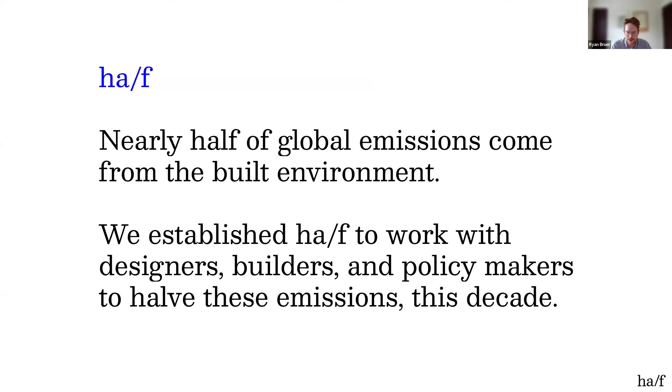And quick intro for HAF. We started HAF 4 years ago and realized that to reduce the construction emissions in Canada, we needed to work together. We needed to raise the bar of education for designers and builders and policymakers. So that's the work we have been pursuing together as a small group of architects ourselves over the past couple of years.

And HAF of what? It's we know that all building has a negative impact on our globe. It uses a lot of raw materials and there's significant greenhouse gas emissions, and our work is how do we halve these emissions and how do we go beyond that? And so today I want to frame our problem as a two-sided coin of the lower carbon and the lower costs.

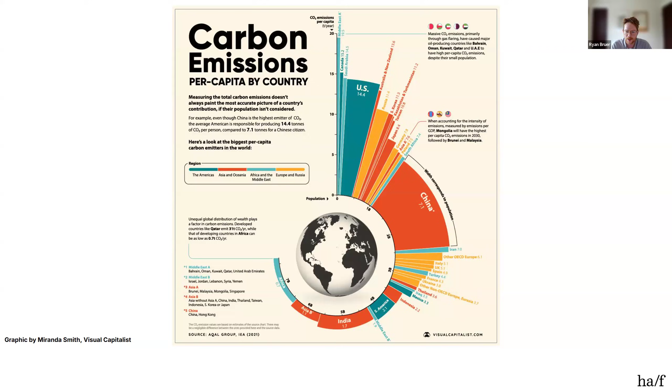We inherit a fairly rigorous federal policy and federal targets around lower carbon. And for us as Canadians, we don't look so good when you line us up per capita against the rest of the world. And so maybe that's good news.

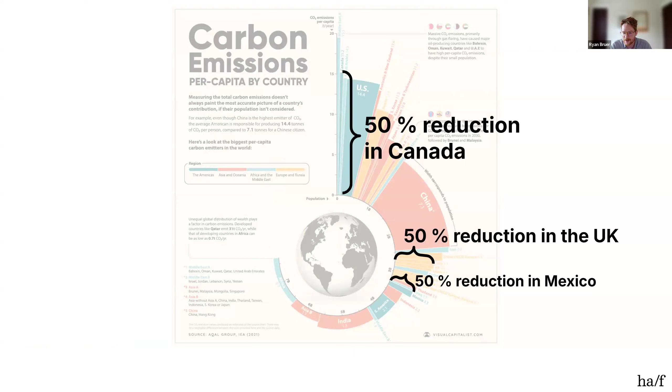Maybe in order to cut emissions, it should be easier for us as some of the top per capita greenhouse gas emitters compared to our friends in the UK or in Mexico, where shrinking that bar by half would be much greater challenges. I think there's lower hanging fruit for us to achieve. And on the other side, we're now on a slow march towards building in Canada, and this idea of how we do it at lower cost.

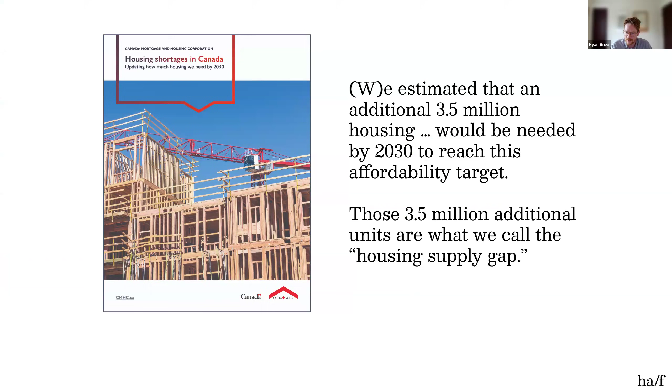We have really ambitious targets for delivering housing, 3.5 million housing units by 2030. We know there are several initiatives like Build Canada Homes that are seeking to do that. But that's also coming at a time where there's this crunch, where we have lower starts this year, and how we're going to get there becomes a little more of a question mark.

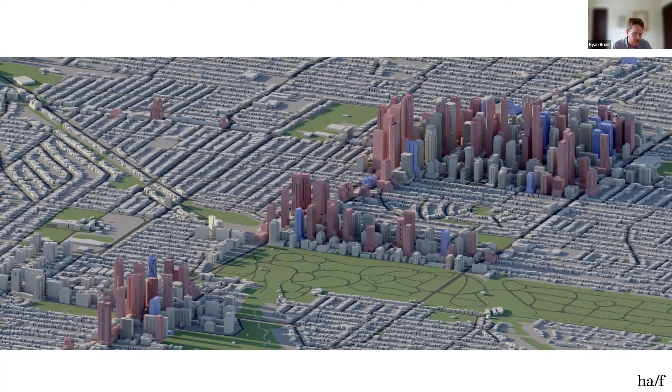At this time, the opportunity is there to reimagine what might have been fixed. We might have seen the type of development that was going to happen in our country, in our province, as a little more certain than it is now. And I think that's an opportunity for us to reimagine.

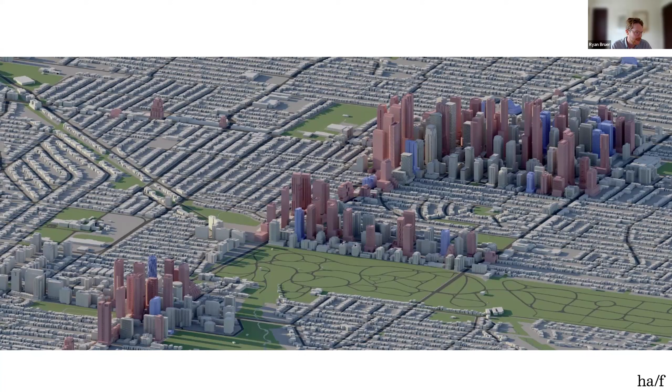Instead, here you can see the proposed projects. This is Midtown Toronto, where the type of density that we imagined seemed certain, and now maybe there's an opportunity for us to rethink it, because we know that not only the method of construction but also our method of planning and development has a huge impact on the carbon emissions of those developments. So here you're seeing, although it's housing for families, for citizens, it's not equal in carbon emissions per year.

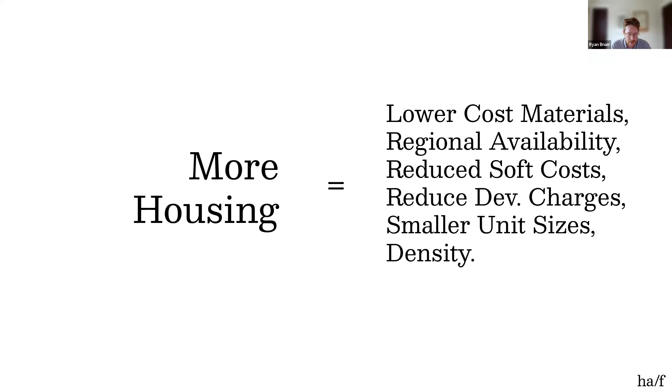So here's our objectives: more housing and reducing emissions. On the one hand, we need lower cost materials. We need regional availability with no supply chain risk. We need to reduce the cost and timelines around design and development charges. We need to rethink density.

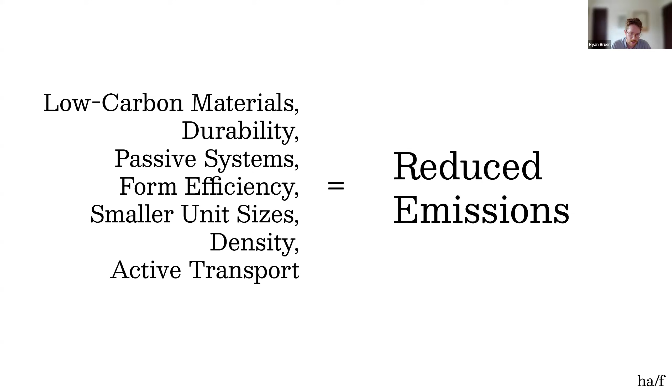And on the other side, we need to understand how materials are made, where they come from, and their life cycle impacts. We need to think through durability and the replacement of materials, passive systems, form and efficiency of unit layouts, and then, of course, how it integrates with active transport that's low carbon.

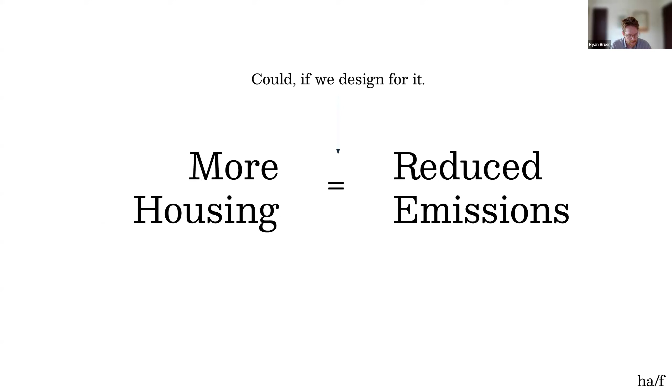And what we want to propose this morning is that I think these can be done together if we design for it. So what we're going to do is share some strategies on how we approach a project at ha/f, and some of the strategy you could take to your own projects.

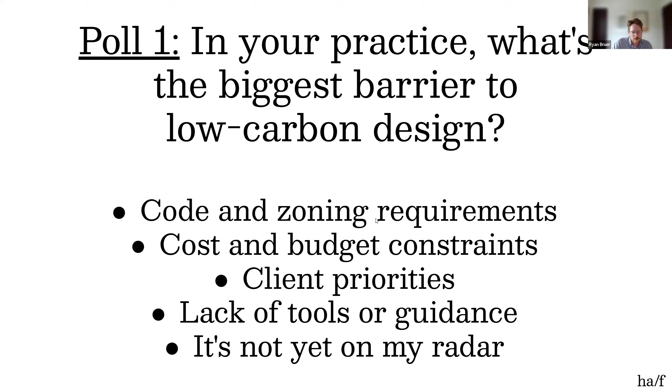And ultimately, that's where we started. We said, okay, we need to raise the bar in design knowledge. We have the findings, we understand the importance of this, but how do we train more professionals and get it out there? This was also on the mind of the Treasury Board Secretariat.

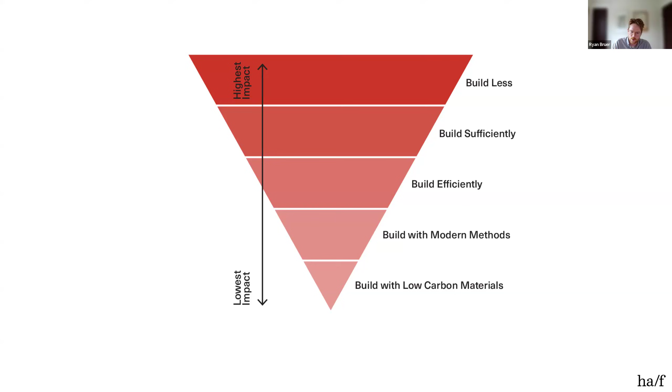They wanted to upskill all their project managers, and the goal was to have a primer for low carbon construction. Together with them, we borrowed a bit from the structural engineers out of the UK, and we found this pyramid of low carbon design strategies to be really successful, because you have at the top the most impactful decisions, and you can work your way down this pyramid to make changes on your project.

We found that these strategies of build less, build sufficiently, build efficiently, low carbon modern methods of construction, and low carbon materials actually mapped pretty nicely onto our phases of the project. Because just like cost, you want to make those big decisions up front and stick with them, because changes late in the game have high cost. It's synonymous with how we think about carbon impacts too, where inefficient structures and unfortunate product substitutions can have a big impact.

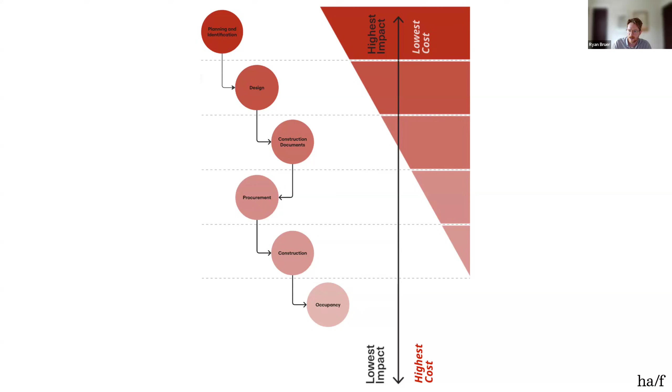So we took that strategy and mapped it onto the project phases, and drilling in even further into the project phases, we want to address how we can ask the best questions at the right moment to get the outcomes we want. So from very early on, you can ask those really important questions about existing assets on site. Is there an opportunity for renovation to extend the life of the building that's on site?

What we found when talking with project managers is that there are a lot of newer option analysis tools and reports that can be produced by consultants that are interrelated, that will inform key decisions on how to best make that decision. So having an energy audit and a whole life building life cycle assessment really gives you the full picture of the carbon profile.

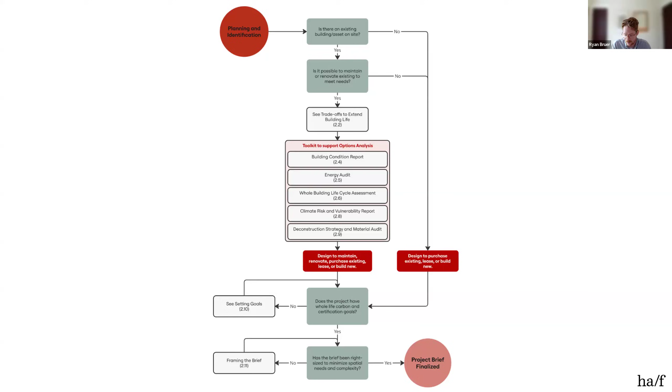So this kind of flow chart here, we produced a few of these for each of the project stages. The idea was how to explain to project managers how these reports interrelate, so that they can optimize their decisions on how to set the right kind of goals, and ultimately, if required, how to right-size a new construction if that's the path that was taken. So let's talk a bit about build less.

What do we mean by that? I think the best way to describe this is about unlocking the value of existing buildings. It's about extending the life of a building, of the kind of carbon bank that we have within our cities. And so the study went through three options.

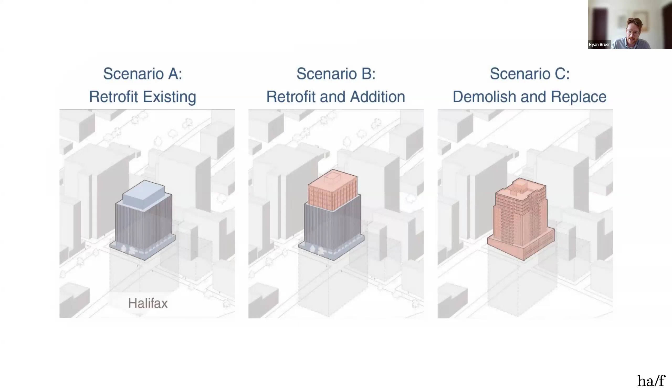We did this work with the Canadian Association of Heritage Professionals, and the goal was to understand how these three scenarios would play out in three cities across Canada: Halifax, Montreal, and Vancouver. We had different scales of buildings: a larger apartment building, what it would look like for a single family home, whether you'd demolish or retrofit, and then likewise for a lower rise mixed use and residential building in Montreal.

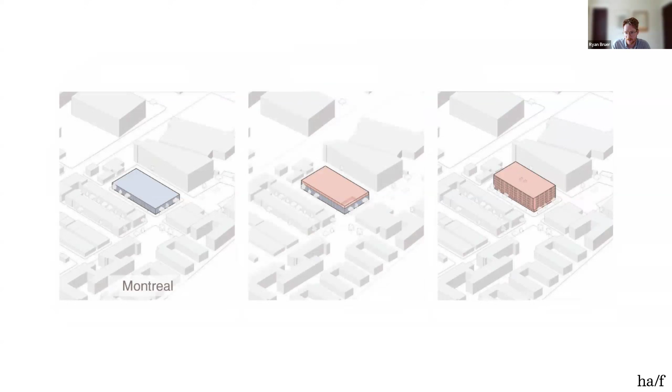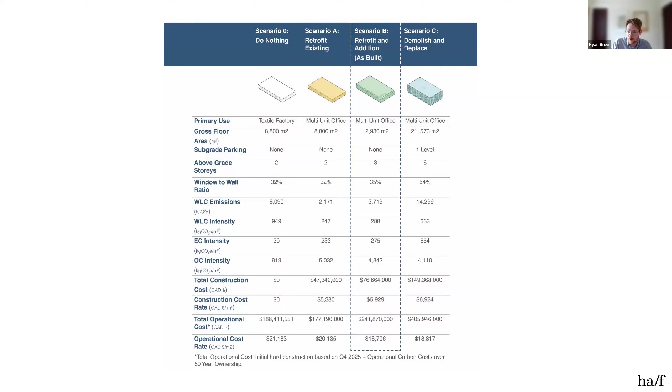And what we consistently saw play out was that for each of these, when you run the numbers on the cost, and on the operational emissions and cost, unsurprisingly, doing nothing is not so good. We have buildings that are high emission, they're expensive to run. We need to upgrade them to suit our needs.

But also on the other side, demolishing and replacing was actually a higher emission activity, and it didn't provide the cost benefit that we were expecting. This was consistent across all the sites and designs, where demolish and replace was in some cases actually slightly higher cost overall than the retrofit and addition option.

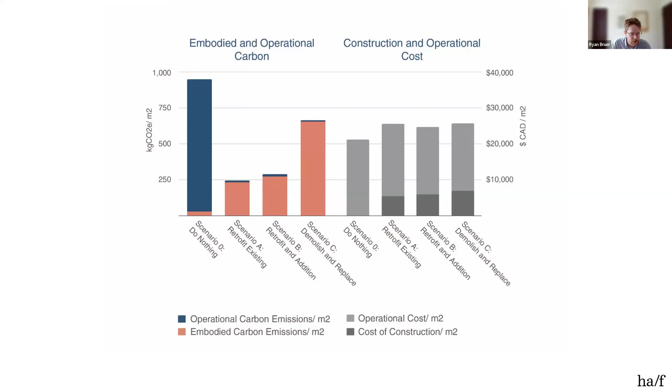From a circular design perspective, this accomplishes what we also, as a secondary goal, want: we want to avoid waste streams. Demolition waste is a huge issue, and as an example of this, in this Montreal example, 290 dumpsters full of landfill were avoided just by doing the retrofit and extension addition option.

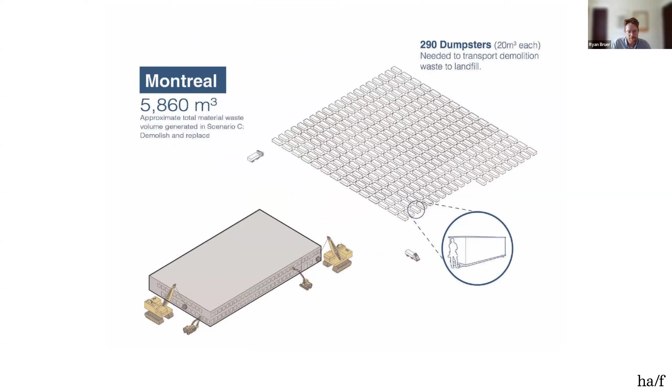So, like the way we do maintenance on our buildings, we were trying to frame this as a way of doing maintenance on policy, because the problem is the National Energy and Building Codes are a bit more prickly when it comes to alterations and reuse.

The purpose of this research was to accelerate code change to standardize renovation in the National Building Code. We have exceptions in a few municipalities across the country, but the goal is to get in there and start repairing essentially some of the codes to allow for this kind of work. It's a long process, and it takes time to make these kinds of changes. And repair is like that, right?

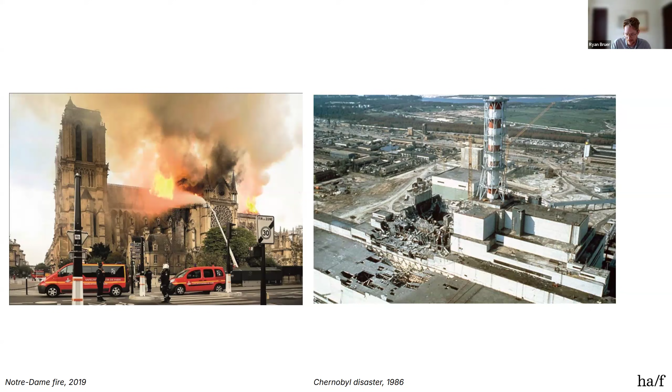I thought I'd share an anecdote, it's a chancy situation, repair. Repair is always a disruptive intervention in an intricate system. On screen we have two famous building disasters, but these were essentially from mismanaged maintenance. The bungled routine system test at the Chernobyl plant led to the nuclear meltdown in the 80s, and more recently, the Notre Dame Cathedral fire was caused by a repair happening in one of the spires. This is one of the challenges when it comes to code changes: we have a very complex system, and we don't want to get in there and move too quickly and break things.

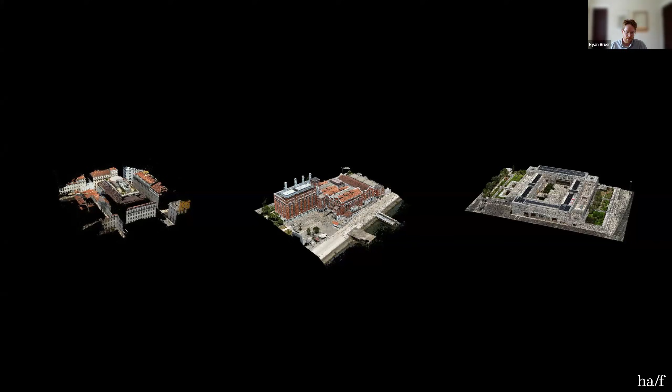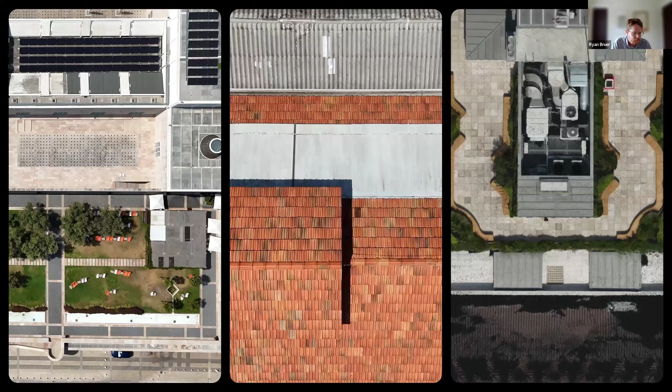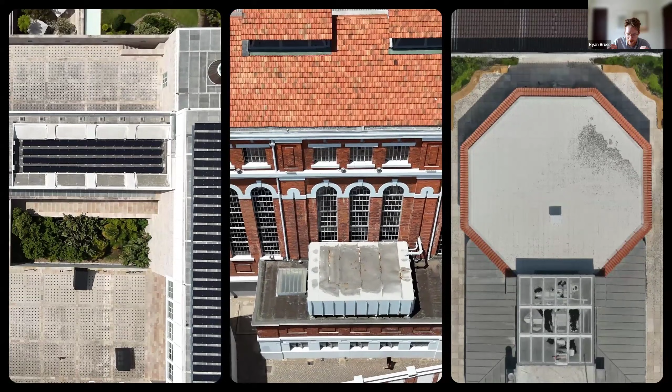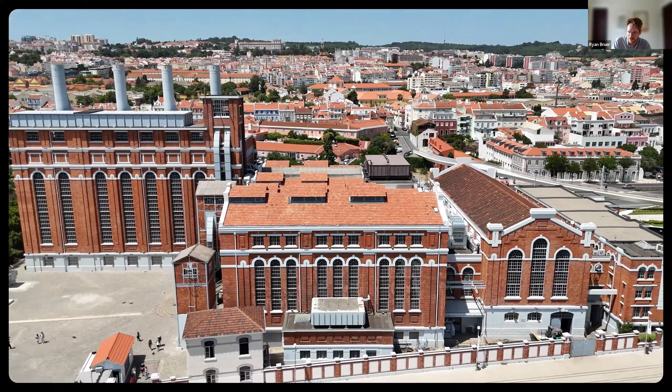Ultimately, I think what we're finding more and more as professionals is that our work, although it might previously have been seen as innovators and imaginers of new projects on a pristine site, is really more often now caretakers of the existing context. I think that's a healthy way for us to think about our practice. We are stepping into a world where everything exists, and it's about our management of that asset. That really was one of the findings we had in Lisbon.

Sufficiency means having enough quantity to meet the need, so I'm distinguishing that here when I talk about building sufficiently, compared to building efficiently, which means producing the maximum result with what you have. We believe that sufficiency is the first question.

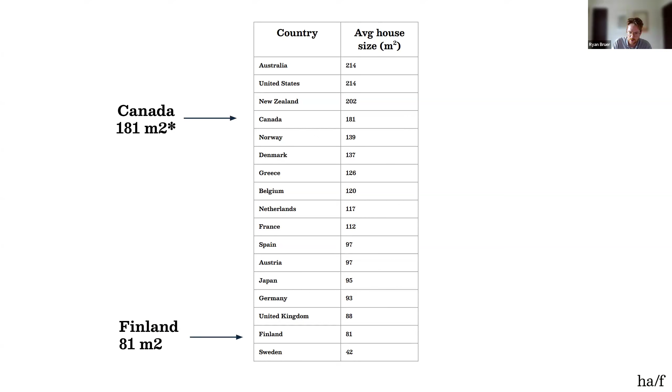There's no better example of sufficiency than thinking about average house size, which over the past 100 years has gotten larger for fewer people. In Canada, we're top ranking in average house size per capita, while we know there are extremely livable, beautiful, excellent places around the world where people live in far less space. This also plays out at the urban scale.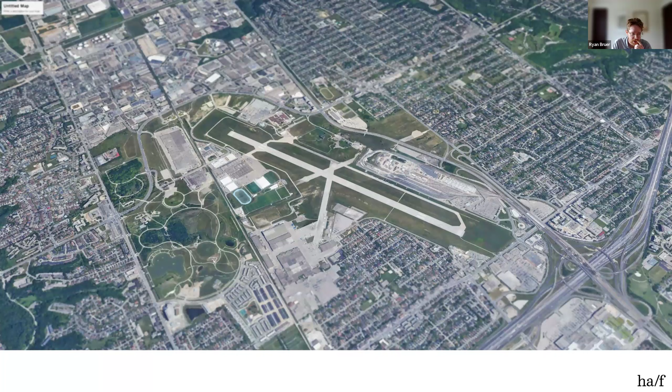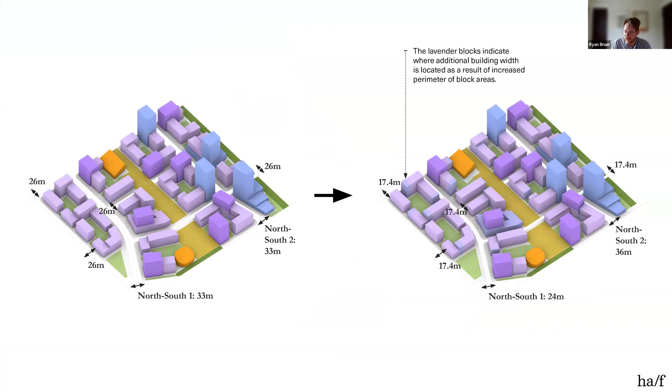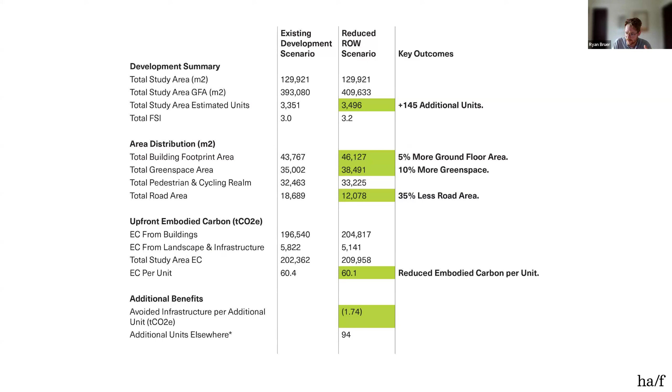We saw this with work we did with Northcrest in the Downsview redevelopment. As the master plan was coming together, Northcrest asked if we could take a small sample area and play around with the right-of-ways to understand if we could meet the traffic and transportation needs while still delivering on the design intent. We began tweaking some of these block shapes and right-of-ways, and you can't really see it visually from the diagram, the small tweaks. But what you're able to deliver statistically is more housing, more green space, and less road to maintain, while still delivering a thriving, rich urban environment.

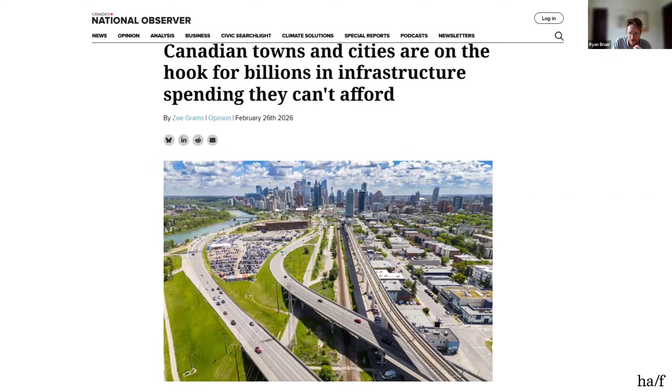Ultimately, this speaks to this ongoing realization that the infrastructure burden is getting carried by municipalities, and we need to start considering that more closely when we think about delivering housing.

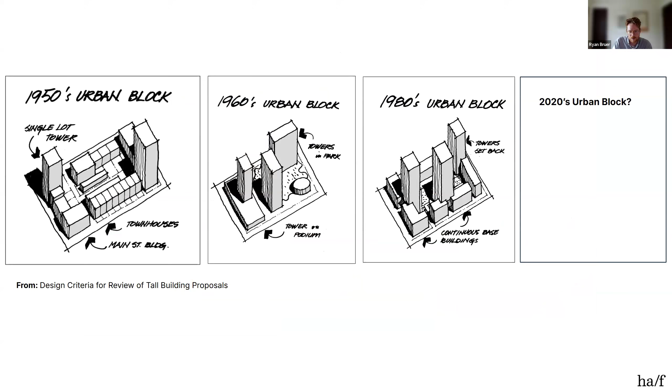Moving on to building efficiently, a good example of this is how do we maximize the use of what we have. We did some work with the City of Toronto on their urban design guidelines. They wanted a fresh look at what's driving carbon behind some of the decisions in here. The first step was looking at the genealogy of the urban design guidelines. It's not a fixed standard, it's something that's evolved over time, and there's this legacy of renewal and modernist thinking around the block. Our challenge was how do we maximize the block, how do we use it for its best use?

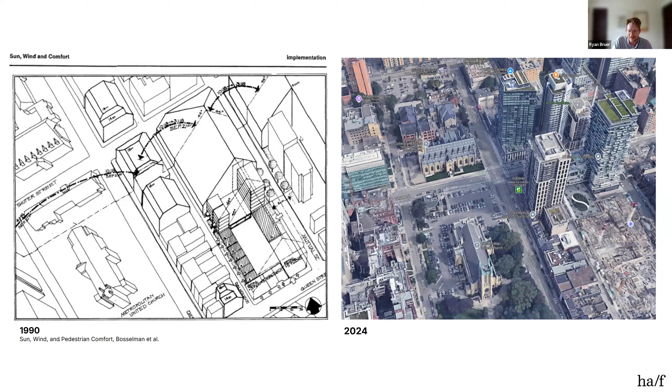We've had some really ambitious aspirations around these urban design guidelines, like daylighting, for example. What you'll see, and I like this comparison, is how these designs were drafted up. This is around one of the oldest churches in the city of Toronto, Metropolitan United. Not exactly what came to fruition, where you have larger buildings ultimately in the end. So the implementation of this policy didn't exactly play out, and unfortunately it has driven and continues to drive a type of building that is higher carbon and higher cost.

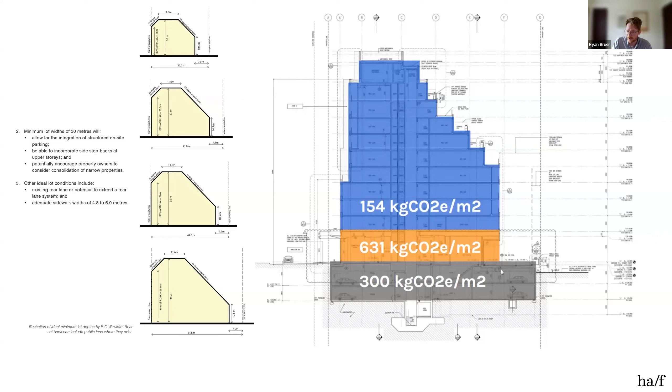This is your typical wedding cake mid-rise building in the City of Toronto, which has had these strict setbacks applied to it. What you see here in blue, orange, and gray is that each part of the building is not the same when it comes to embodied carbon.

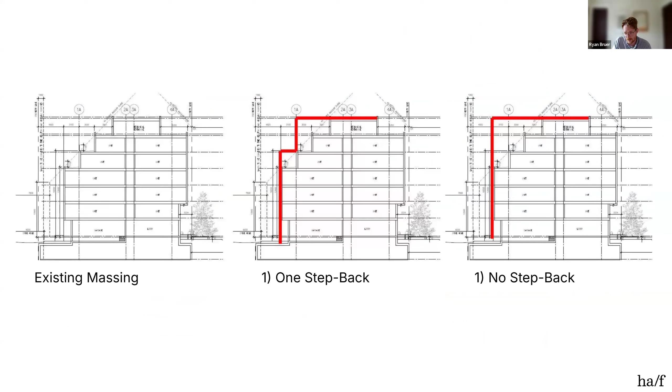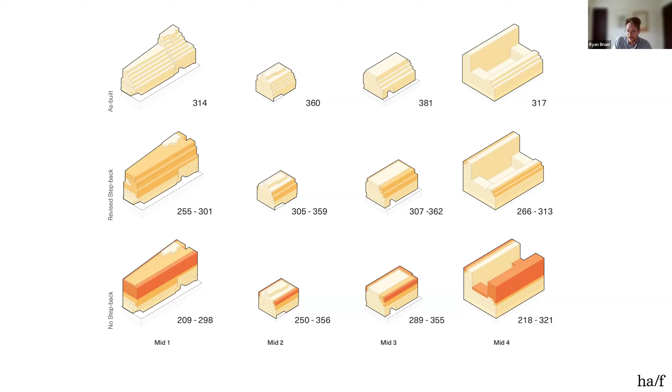Part of the study was, okay, what if we didn't have these setbacks? And the reality is, if you don't have them, you can deliver more housing, and you can more efficiently distribute the services of that building within the building.

We're pleased to know that this work has gone on to inform policy changes. The City of Toronto has reduced some of the daylighting requirements, and so it's encouraging to see. But there are still a lot of these policies across Ontario municipalities.

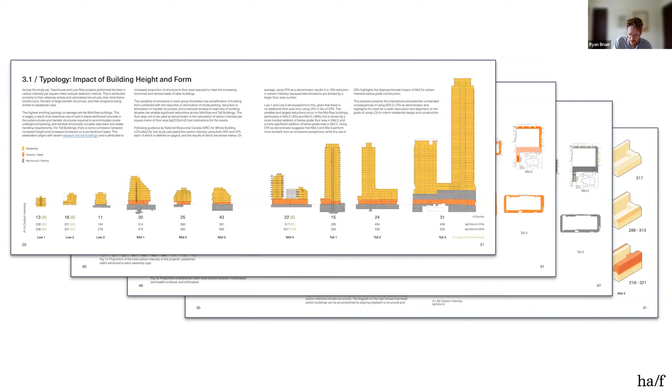I'll stay on this one more thing, a kind of aha moment for us was the Type G loading. We have waste management services that are fairly large—not this large in every city across the world, but we have to manage some pretty large trucks. Ultimately, the requirements of the interiorness of the waste management just blows out these ground floors and leads to structural requirements for transfers and the like, in addition to other asks we have of the ground floor.

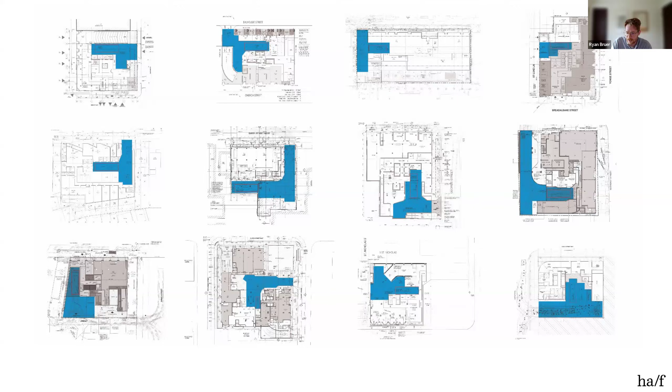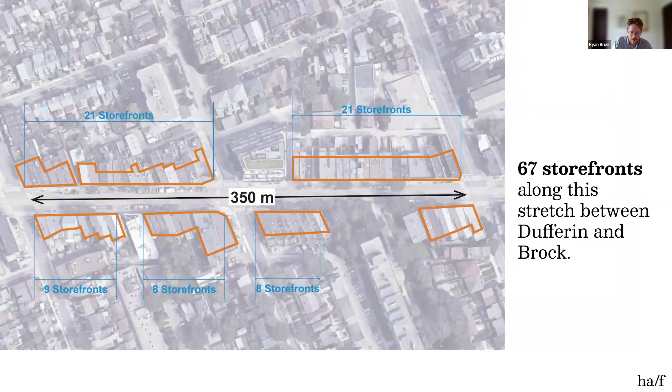We're very excited to see this work getting taken up in the conversation, because there's a lot at stake—our beloved storefronts along the iconic streets of Toronto are really at risk, because you can't program the kind of narrow, ideal retail spaces when you have to develop large sites with large parking and large waste management. You can kind of see this overlaid here, where you're going to end up with more—you'll just have Shoppers Drug Marts all the way along, probably.

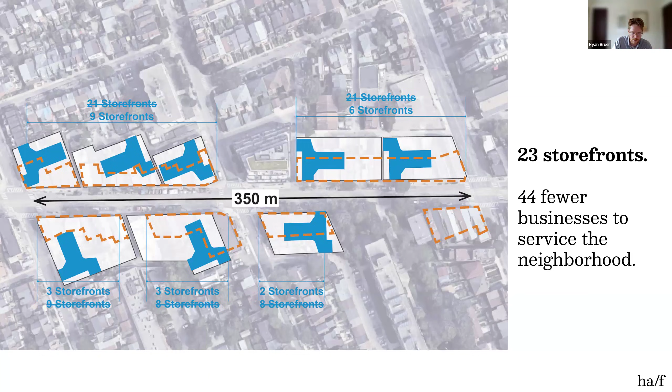We're excited to see that the city actually approved a review of the Type G loading requirements very recently, so that's underway right now. Working our way down here.

Building with modern methods often refers to prefabrication, offsite construction, digital technologies, and those all apply. One more I'd add recently is the CMHC Housing Catalog, which is an exercise of delivering more advanced knowledge more quickly across the country. The housing catalog has gone through iterations over the past century, and the most recent one attempts to put in the hands of home builders and small developers accessible drawing sets and designs that, in our case, have carbon and energy use assessments already baked in.

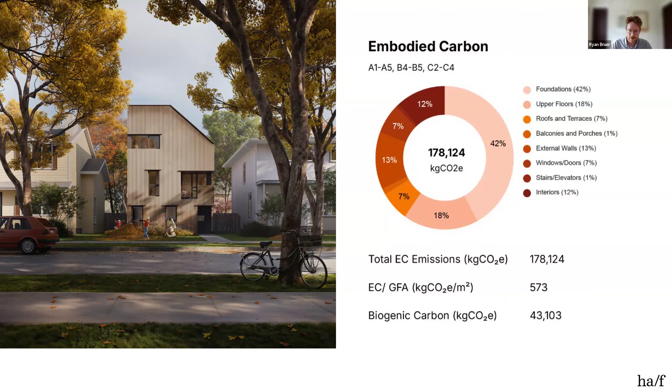It allowed us as a design team to put together more efficient, more optimized designs, so that doesn't need to be a question for people looking to deploy this in cities more quickly.

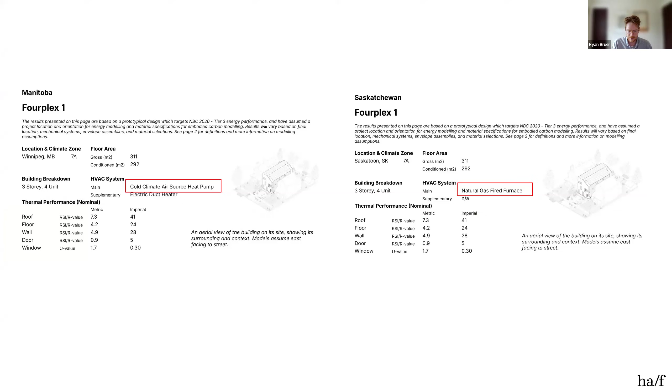One of the most interesting things about this exercise is realizing that the baseline is not the same across the country, particularly around material choices, supply chain access, and the assumptions around HVAC systems—these had a large impact. On the left, you can see in Manitoba the assumption around using an electric system, an air source heat pump, would lead to very low whole life carbon.

In Saskatchewan, when you make the assumption that it stays on natural gas even as a new build, the upfront carbon becomes dwarfed, and really the operational emissions become the imperative as far as reducing the emissions of that project.

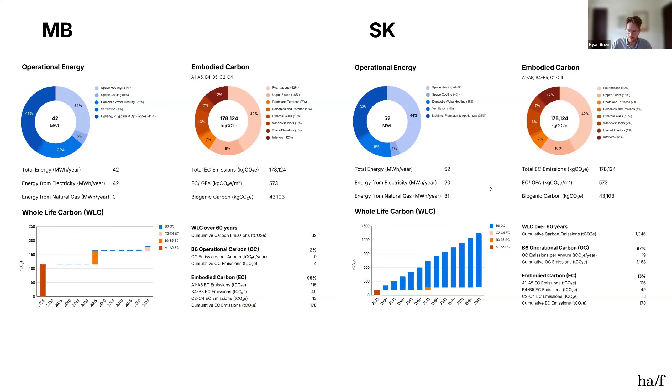And so here they are side by side, we call this the whole life carbon profile of the building, drastically different. And this immediately tells you which things you need to pay attention to make reductions.

And of course nowhere's the same. In Manitoba and Saskatchewan you have a totally different electricity grid profile and emissions. In Manitoba emissions are quite clean versus Saskatchewan, so that has also a huge role in doing these assessments.

So yeah, we were pretty pleased to be a part of this evolution of the CMHC guide. And interesting to see when you look back, some of the decisions around materials that have changed over time.

So in 1967, when we talked about rigid insulation, and I've got a lot of text here, but at the bottom, rigid insulation could be made from wood, vegetable fibers, mineral wool, and then of course you have your polys in there too.

But if you zoom over a couple decades up to 2013, rigid insulation now is exclusively board materials such as polyisocyanurate and expanded or extruded foam plastics. So somewhere in there, within 40 years, we somehow lost the language of vegetable fibers, wood fibers, and mineral wool.

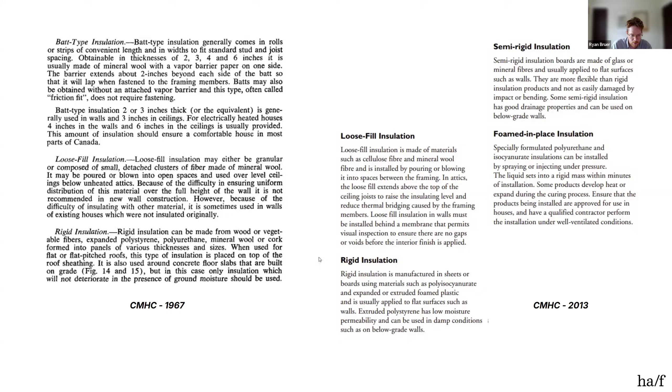And so one of our chief goals was to get some of those low carbon materials back into the menu of these buildings. Our material guide was an attempt at that, to provide builders with a very quick lookup sheet for types of materials.

So all the way through insulations, membranes, cladding products, to show that they're not all created equal, and to provide the cost and carbon narrative in a very easy to look up manner. We also included a kind of relative life cycle cost, assumptions based on the replacement cycle of each of those products.

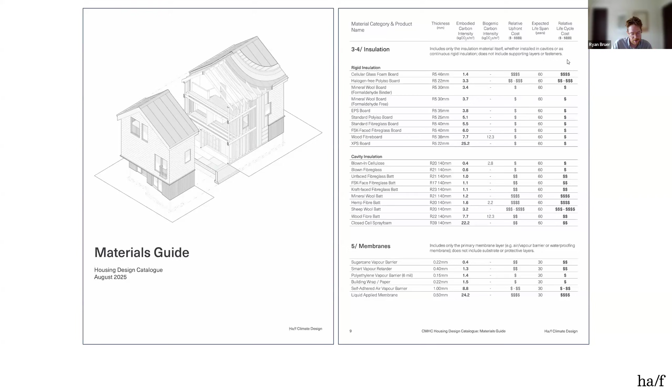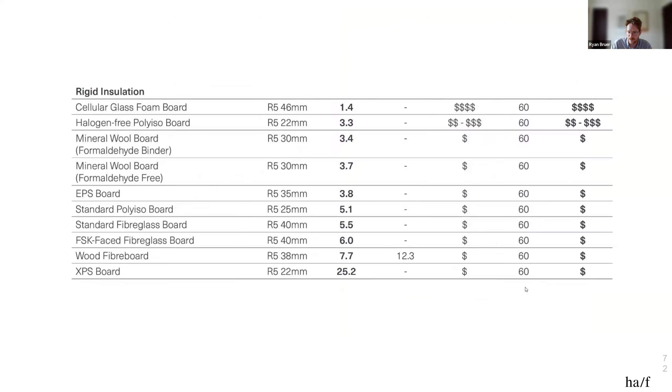So as an example here, just products you'd be very familiar with, but trying to demonstrate that some need to be avoided rather than others.

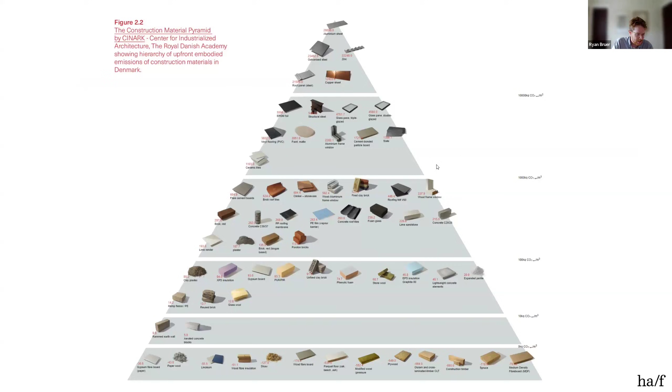And in this case, we're talking about choosing a better material for our design. But as a bit of a transition over to Jana, that's not always the strategy. It doesn't necessarily always need to be the strategy. You don't have to throw out all the other materials and go find materials exclusively made of straw. There can be opportunity to build with low carbon materials by making substitutions for a better version of the same material.

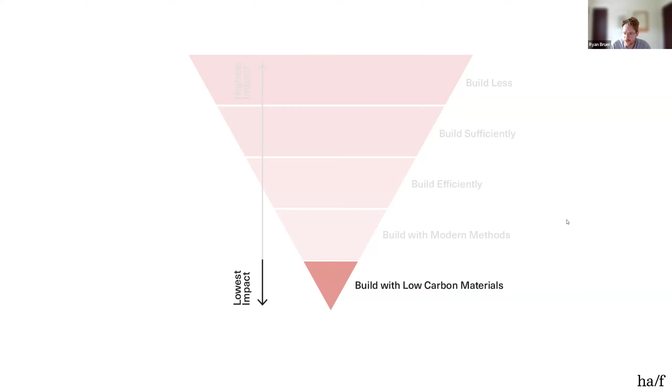And so I'm going to hand it off here. But as I do that, we'll go into poll number 2. And when you think about reducing embodied carbon in a project, what's your instinct?

Is it to swap a different lower carbon material? Is it to find a lower carbon version of the same material? Can you just reduce the quantity of the material used? Or perhaps you haven't had a clear approach to this yet.

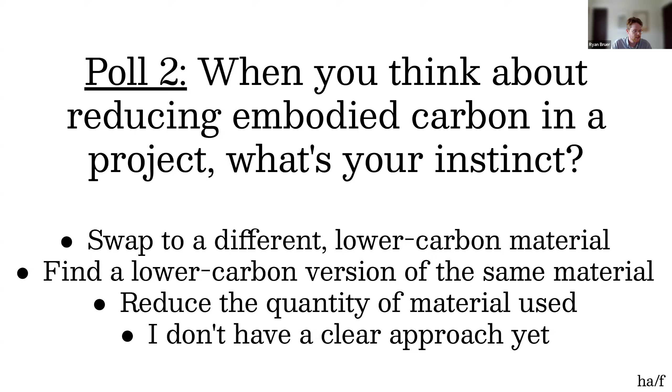All right, thanks, Ryan. I'll just, let's see. I'm not seeing the poll anymore, so maybe Ryan, you can tell me if we've got the results.

Okay, the results are coming in. Yeah, you got them there? So what I'm seeing is swap to a different lower carbon material as the number one choice, and then find a lower carbon version of the same material as a secondary choice.

So I think we got some more work to do on that pyramid, Ryan, to drive home the importance of reducing the quantity of material used as well, which is coming in third here. But this is great, we'll talk to a few of these options.

So as I mentioned in my intro a little bit, what I work on is public policy, not architecture. I should not be allowed to design any buildings. So in the second part of the session, I will give a bit of a public policy perspective on embodied carbon. How can policy requirements help us reduce emissions from the building sector?

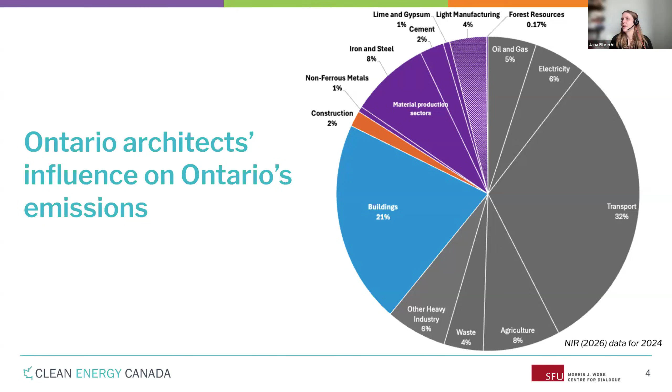But what I also want to talk about is the ways that the building sector and architects specifically can have an effect beyond their own sector. And that is this huge chunk of our emissions profile made up by material production sectors - the steel plants in Hamilton, cement plants, manufacturing, lime and gypsum, etc. Of course, the emissions from what we produce in Ontario don't cleanly align with the materials we build with, because we import and export. But worldwide, this is also a big slice of the pie.

So about 5 years ago, I believe, we at Clean Energy Canada were working on industrial decarbonization. How can we use government policy to push the cement sector, the steel sector to reduce their emissions? We looked at a lot of supply side solutions - how can we help with innovation, technology development? But another really important piece of the puzzle is the demand side solutions. How do we create a market for lower carbon alternatives?

And so this is how we started thinking about this policy instrument called Buy Clean. We've been doing a lot of work on it since. We did a big report quantifying what the emissions reductions would be of doing this as a whole-of-government approach. We looked at some of the things happening in the US, mostly at the state level and under Biden at the federal level at the time, and in Germany, and what we could learn from that. We've done a lot of work with the construction sector, talking about what implementation of these kinds of policies would look like.

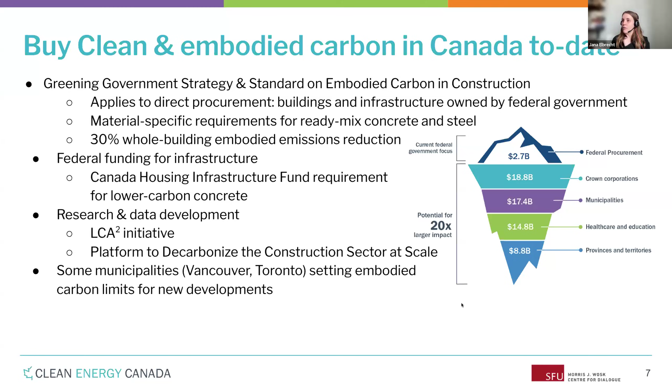But more needs to happen at these other levels of government as well. Some municipalities have done some work - Toronto with the Toronto Green Standards, and Vancouver has been a real leader on this. Toronto is a little bit in flux right now with some of the things happening around green development standards. But that's a bit of an overview of what's been happening in this space, which overall we're pretty happy with. The federal government has also done a great job supporting some research, including the guide that Ryan showed previously that HAF worked on. What else is going to happen in the future?

I can't tell the future, but what we're hoping to see is some more requirements on federal infrastructure funding. The province in Ontario has been a little missing in action on this file, so it would be great to see some provincial requirements. But then another very important development that's forthcoming is the national model codes for 2030.

The 2025 national model codes, which were published recently, had these operational carbon requirements in them. But now for 2030, there's also a working group working on embodied carbon. This is still very much in the development process. So if this was something you're interested in but weren't aware of yet, I would highly recommend going to the CBHCC website and also looking at some of the open meetings that are happening.

But what it looks like now, in the most recently updated policy position that was published, is that this is likely going to cover A1 to A3 phases - so the material production for the structure, and potentially the envelope. That's still TBD. And there might be a tiered approach, same as with operational carbon and energy efficiency requirements, giving room for provinces to step in at different levels of ambition.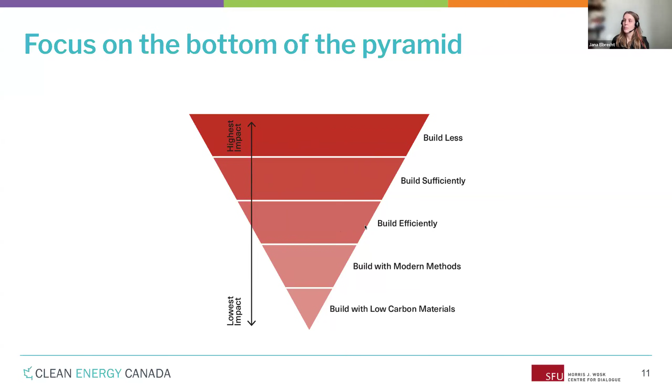But what we focused on in this research, on what the cost implications are, is when we go back to this pyramid - it's the bottom of this pyramid. Importantly, as Ryan said, some of these earlier stages actually do have higher impact and are usually lower cost. But once you get a project going, and with policy, we're a little bit more thinking about how can we build more efficiently and how can we build with lower carbon materials.

So when we look at lower carbon materials, importantly here we're looking at like-for-like swaps. We're not comparing a steel structure with a mass timber structure - there's lots of cool research out there on that, but this is more: what if we used lower carbon concrete? We built the same exact building, but we just change our concrete supplier and use a concrete mix with some fly ash mixed in or some steel slag.

So the way we did this is we worked with general contractors to use real world buildings, existing buildings. In the two studies combined, there were 12 case studies across 6 provinces. The large group were multi-unit residential buildings. We looked at the project as built, the material quantities in that, and we basically re-estimated what a lower carbon equivalent for these materials would look like, and what that would cost.

So this is a bit of an overview table combining the 2 stages of the study. Our report to be published is currently being designed, so please excuse some of my not perfectly centered graphics - our graphic designer is working hard to make it more beautiful. Some of the things we're looking at here for alternatives is using SCMs in the concrete mix, using recycled steel and electric arc furnace for rebar, using bio-based alternatives for insulation. Sometimes it is a little bit of a different material for insulation, but we definitely made sure it had the same performance.

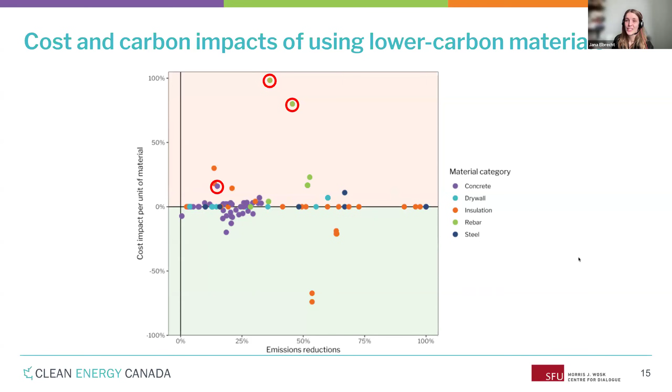The standard on embodied carbon that the federal government has includes a bit of an escape valve - if your lower carbon steel comes in at a premium above, I believe it's 2% of the structural budget, but please check the policy for the exact number, you don't have to comply. Obviously we want to use lower carbon materials where they're reasonably available, and in most cases they are. So what we always say is just ask - most of the time we're not using lower carbon materials because we're not even asking if they're available.

But to kind of move back up that pyramid, we also, especially in a public policy space, wanted to talk about the fact that there's all this interest in using lower carbon materials - great, that's lower hanging fruit - but there's even more that we can do in the design phase.

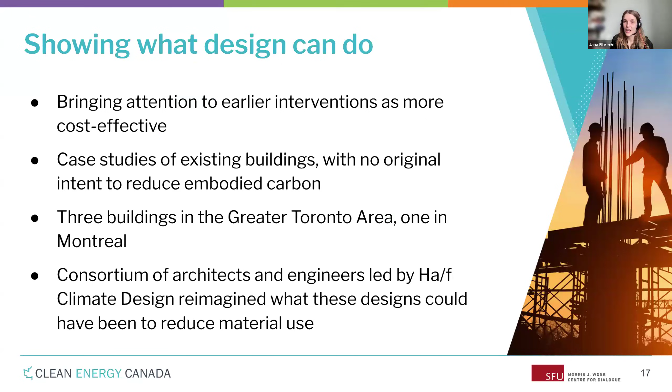So we again looked at real world case studies, buildings. Ha/f did this work with us - 3 of them were in the GTA, and now for the new iteration of the research, we added one in Montreal. This is just to show what we can do with earlier interventions in terms of reducing the use of materials, which can reduce both the embodied carbon and the cost of the building. I'll quickly run through some of these, but for more details, please have a look at the report.

So the first one are these townhouses. We looked at 4 interventions here, which together added up to about a quarter embodied emissions reduction. One was the envelope - this was a block of, I believe, 6 townhouses in a row, and they had these little pop-out windows to visually distinguish one from the other. The research consortium looked at what if instead we visually distinguish these units by using colored bricks or a brick pattern - then we can save all the steel framing and cut about 9% of the emissions.

They also looked at, for example, a sloped roof, which on the upfront emissions doesn't have the most enormous effect, but over the lifetime of the building, it might avoid replacement of materials. This is also thinking a little bit higher up in that pyramid - how can we build more efficiently over the lifetime?

And then this one we'll see coming back again and again - I think Ryan already mentioned that obviously below grade construction is one of the most carbon intensive things we do, with all of the shoring, all of the concrete required.

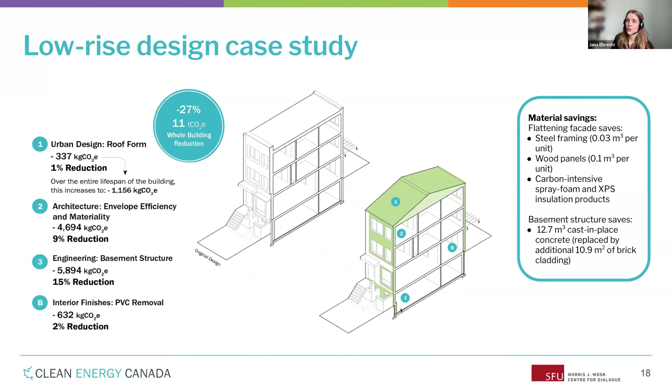To give you a more striking example of that, this is our mid-rise design case study. Here there was this, I want to say, quite enormous parking garage below ground. The team looked at what if we brought that above ground, and they found that by doing this, there would be the same number or even a little bit more parking spaces, same for the housing area. But these different interventions together reduced the embodied emissions again by around a quarter.

This is really about not building underground. It saves a really thick concrete slab, saves a lot of excavation and shoring. And as a little co-benefit here...

They ran a neat little calculation of how many trucks of excavation volume we're talking about with a building like this. This is a building in downtown Toronto, actually quite close to where I live, I walk by it all the time. Just think about what 2,500 trucks does to the traffic on that street.

So other co-benefits to think about, also construction timelines. Sometimes building underground can really prolong that timeline. So if we're talking about affordable and quick build-out of housing, these are some of the things we can think about. We worked to quantify some of those material savings, because you're not only saving emissions by using less concrete, you're also paying for less concrete.

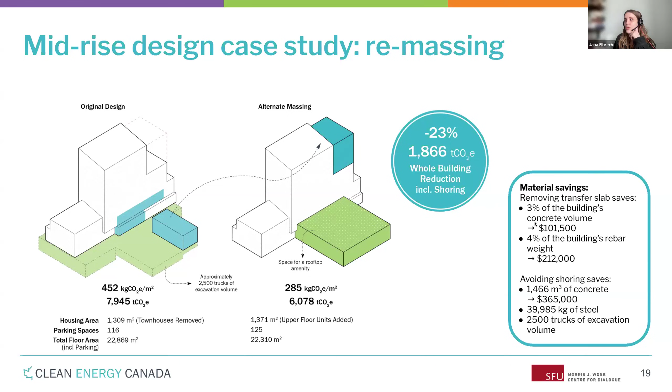Last one here was the high-rise design case study. This also has a bit to do with those urban design guidelines in Toronto, because one of the things is this remassing, this simplifying of these different levels, which made a huge contribution to embodied emissions reductions. But another thing are these three different layers: there's an underground parking garage, then there's the retail level, and then there was about 600 housing units.

But because they all had different grids, different structures, and they weren't aligned, the pillars weren't aligned, they required huge transfer slabs. So one of the things the team looked at here was, what if we align those levels? What if we shift—I don't remember the direction, whether it was southwest to northeast—or what if we move the tower from one corner of the building to another and align those layers? You can get rid of 22% of the concrete and 13% of the rebar by not having that transfer layer. Those are huge material savings, huge emission savings for the same function of the building.

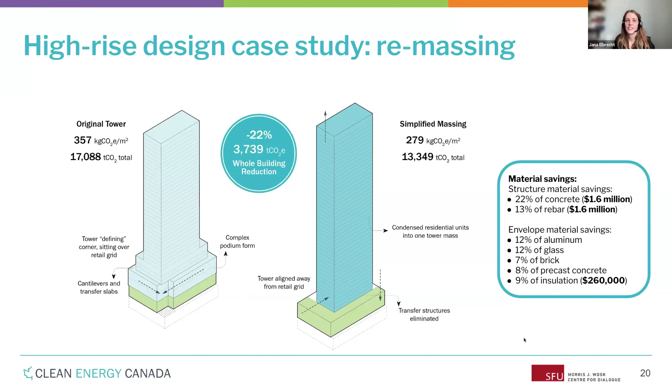And this is for the envelope, so simplifying some of the outside. There's more details in the report, but I'll have to wrap it up soon, so I'm gonna inevitably send you to our website.

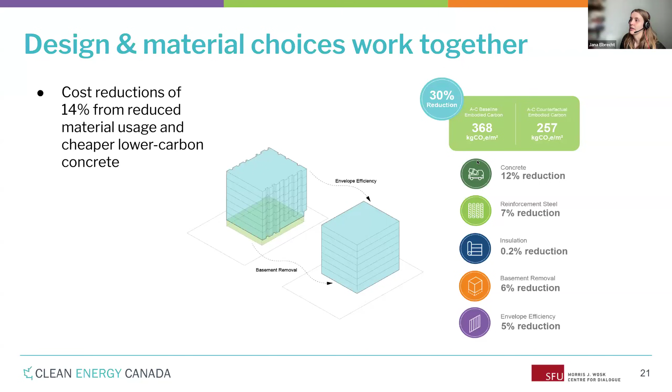We also did one more recently in Montreal, in our newest report, showing how material efficiency and design can work together to achieve a 30% reduction in embodied emissions and a 14% reduction in costs, by removing the basement, thinking a little more about what the envelope looks like, and using lower carbon concrete, recycled rebar, etc.

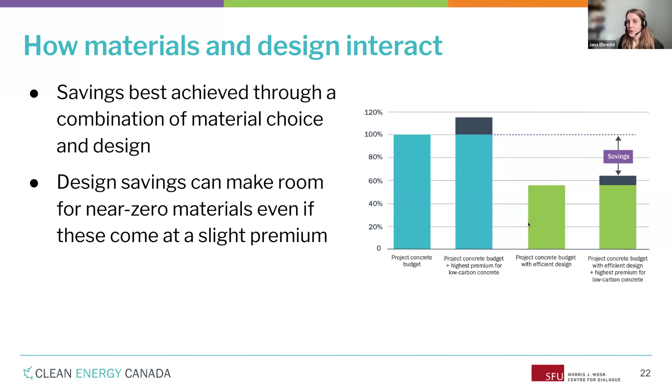And we also really want to show that savings are best achieved through a combination. When you use less concrete, you can pay a little bit more per cubic meter of concrete. So even taking that highest premium we found, even if you pay 16% more per cubic meter of concrete, if you use less concrete overall, you've got that room in the budget. So thinking about this early and in a more integrated way is crucial.

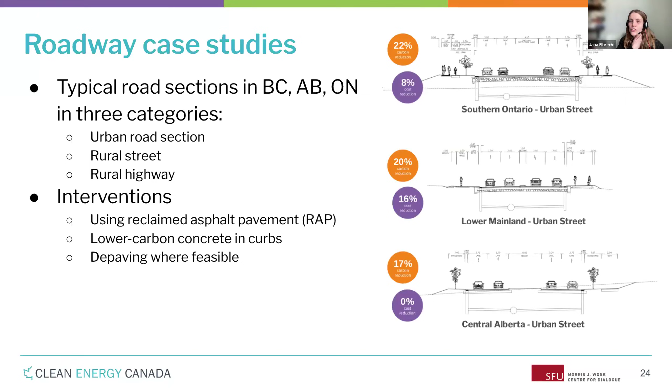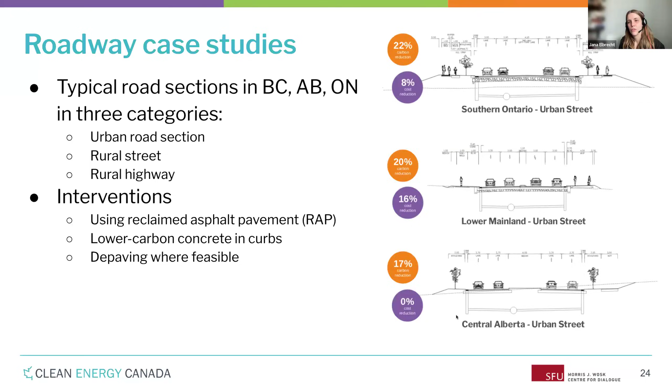I'll quickly run through some of the things coming up in our new research around infrastructure. We've worked with Hatch to also look at roads, showing that if we use reclaimed asphalt, if we maybe depave some of the side sections, if we use lower carbon concrete in the concrete elements of our roads, we can hugely reduce the carbon embodied in our roads, and most of the time it actually reduces the cost.

We looked at water treatment plants, and again found that you can use lower carbon concrete, lower carbon steel. Most of the time we did cost estimates for this as well, and most of the time they came in at around the same price.

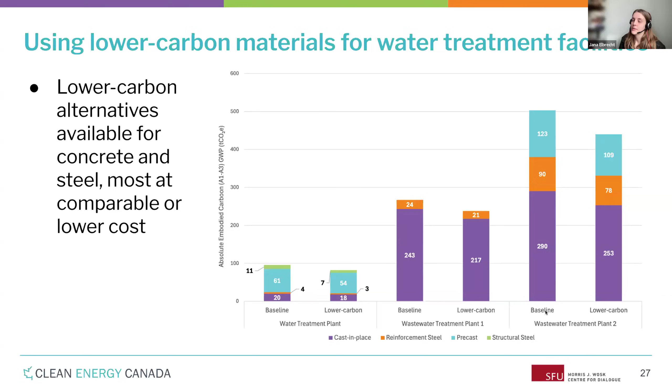But I'll leave you with some takeaways. Looking at the poll, it's very interesting to see that so many people are thinking about lower carbon materials, either swapping out a material or using a lower carbon equivalent. And this really is a great low-hanging fruit.

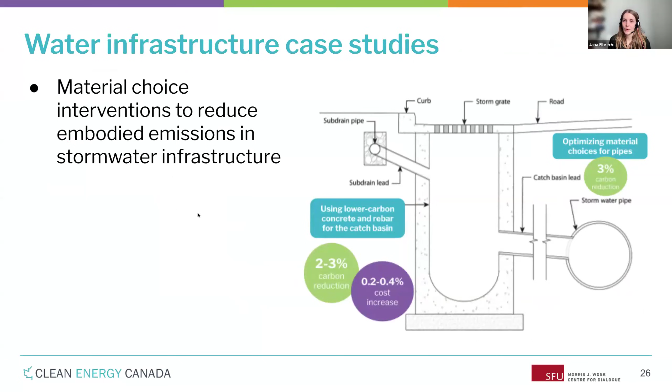We can already use lower carbon concrete quite easily in a lot of projects. But don't forget that pyramid that Ryan showed you. Design and planning decisions can often have a larger impact and can help with some of that cost question, especially with some of the infrastructure case studies that I showed you. It's great to use lower carbon materials for a pipe, but the biggest predictor of the embodied carbon in water and road infrastructure is how much road we need to build per person, how much water infrastructure we need to build per person, whether that's a single family home subdivision or a more high density neighborhood.

And yeah, it's coming down the pipeline in the codes. So definitely, if you haven't started thinking about embodied carbon yet, you have a few years to really wrap your head around it in your practice.